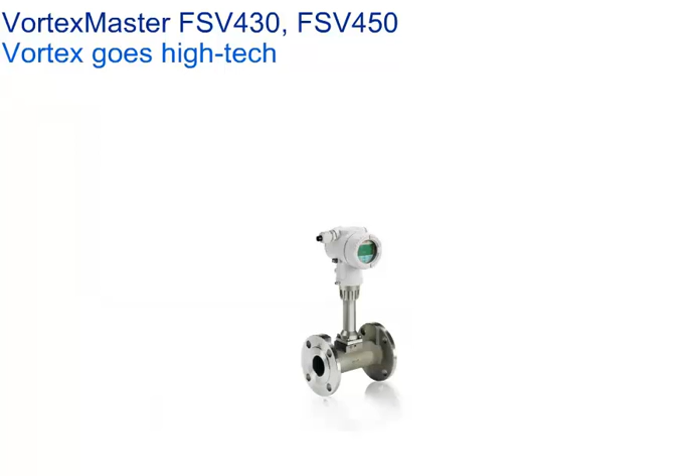The latest generation of Vortex Flowmeters is setting new standards in Vortex Flow metering. The following features are completely new: excellent vibration compensation, and the meter outputs as volume flow, temperature and pressure compensated volume, mass or energy flow.

The operating concept: typically, a Vortex Flow meter consists of the following main components: spool piece, piezo sensor, transmitter. The interaction between the piezo sensor and the transmitter is very important, as the raw signal from the sensor is often very noisy due to pulsation, vibration, and other hydraulic effects, and the transmitter needs to effectively filter out all of the interfering components to detect the correct flow signal.

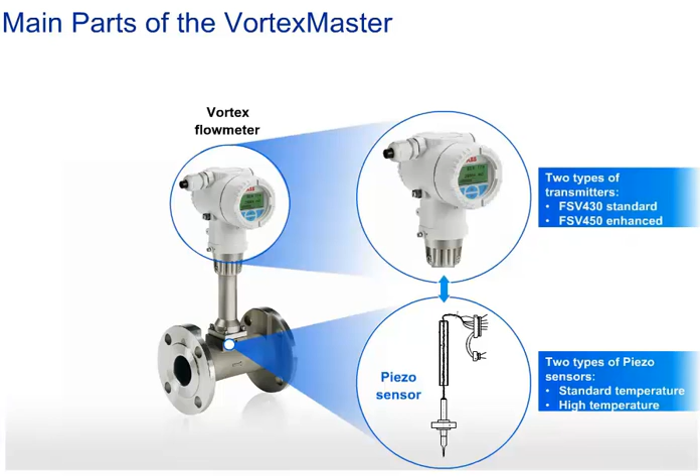The new generation of VortexMaster uses two types of sensors, one for standard temperature and one for high temperature. The ideally balanced piezo sensor is the heart of the sensor construction. To filter out noise and vibration at a very early stage, it uses two compensation piezos in addition to the two flow piezo elements. This makes the sensor signal very reliable and enables precise recognition of the actual flow signal.

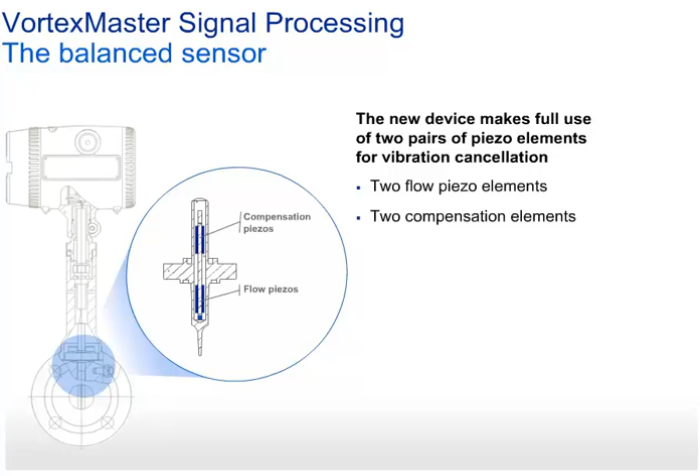As mentioned in the Basic Technical Principles module, the vortex signal is not a clear sinus curve, but is affected by hydraulic noise and vibrations, etc. Therefore, it's sometimes difficult to detect the right vortex frequency without any dropouts or additional peaks. Conventional vortex flow meters tend to measure in the same range as digital devices, but often less precisely.

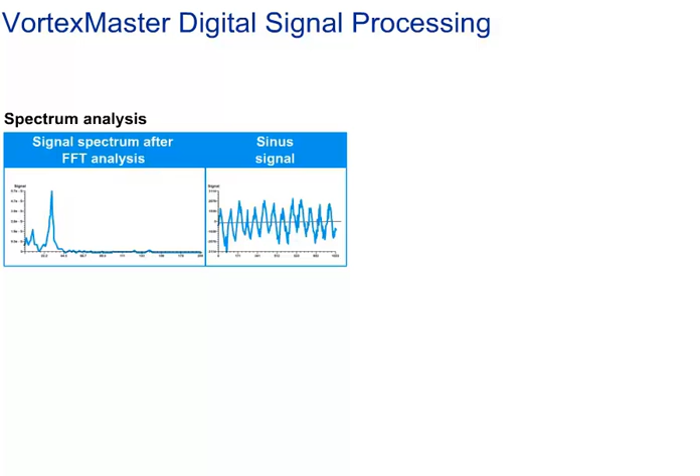Typically, the highest peak is the flow signal, but especially at low flow conditions, this may not be the case. A vortex meter without intelligent vibration control would pick up the highest peak and translate it into volume flow.

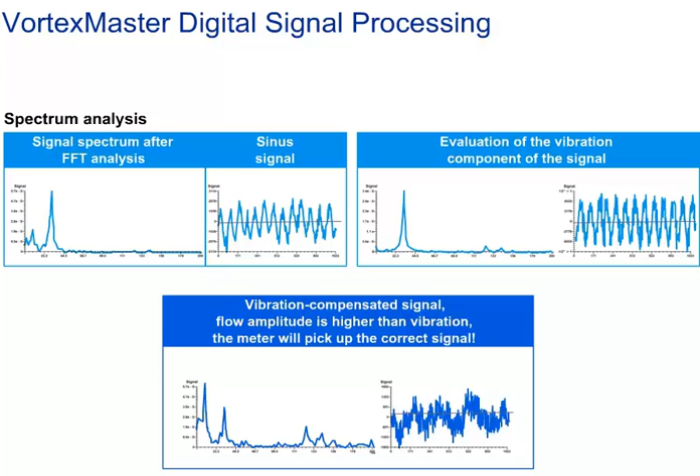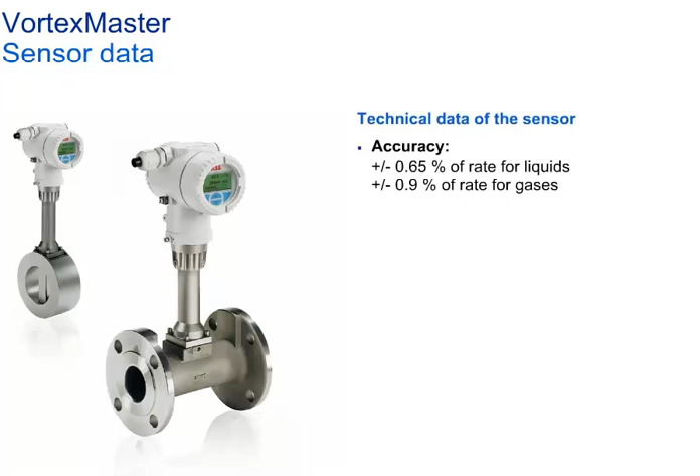Digital signal processing ensures maximum measurement precision and reliability. The accuracy is plus minus 0.65% of the rate for liquid measurement and plus minus 0.9% of the rate for gases. All meters are wet calibrated in water.

The standard temperature range is from minus 55 degrees centigrade to 280 degrees centigrade, which is minus 67 degrees Fahrenheit to 536 degrees Fahrenheit. A high-temperature version for up to 400 degrees centigrade, 750 degrees Fahrenheit, is available.

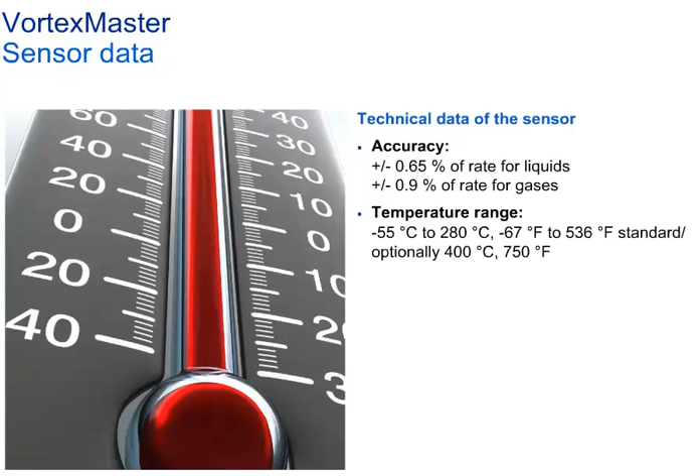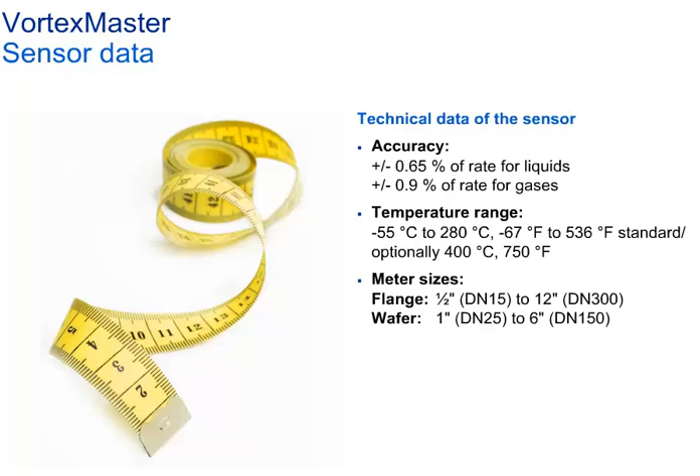The meter sizes for flanged meters are DN15 to DN300, that is, half an inch to 12 inches. Wafer-type meters are available from DN25, 1 inch, to DN150, 6 inch.

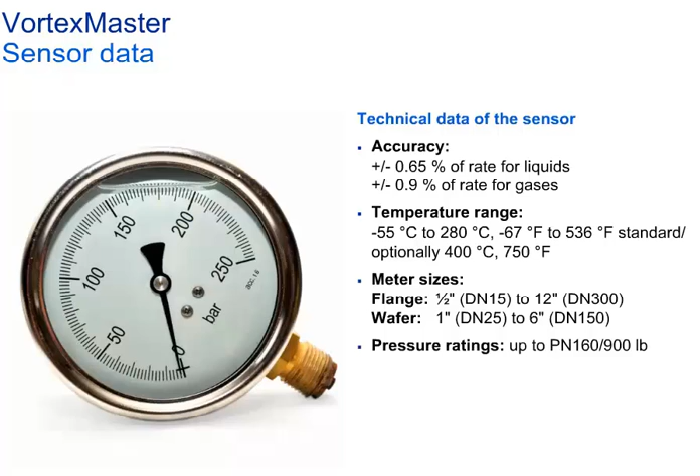The standard pressure rating is PN40, class 300. For non-standard devices, a pressure rating of up to PN160, class 900 is possible. The sensor housing is made of stainless steel 1.4571, which is ASTM 316 Ti. The casted meter bodies are made of CF8C. Hastelloy C or duplex, super duplex bodies are available on request.

The DIN wafer design has a 65mm lay length for direct exchange of standard orifice plates. The ASME design is available with longer lay length.

The basic meter is now more basic. It is supplied only with a 4 to 20 mA output, and it provides HART communication in the absolute basic version. This means that the display, HMI equals human machine interface, and digital outputs such as pulse output, frequency output, and contact output are now options.

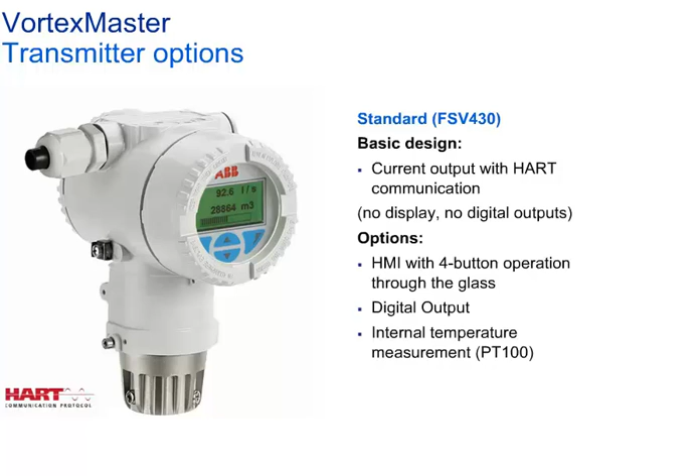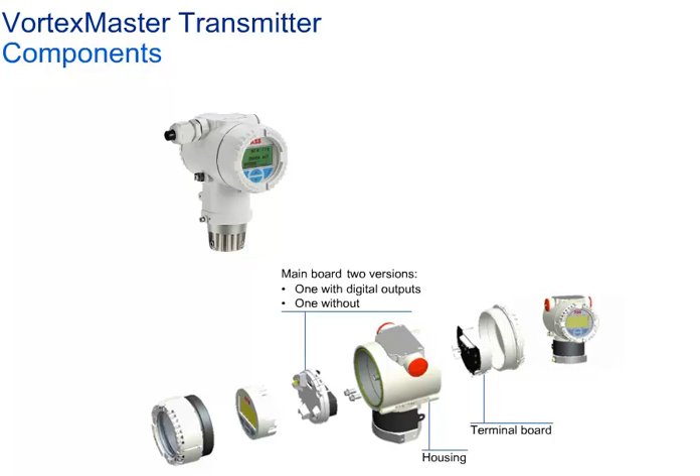The VortexMaster transmitter contains housing, terminal board, 2 different versions of the main board, optional HMI, display module, back and front cover. The transmitter housing is available in aluminium and stainless steel.

Depending on the option for digital output, the terminal board and the number of lead routings in the housing are different, meaning that a digital output cannot be implemented retrospectively without changing the complete transmitter box.

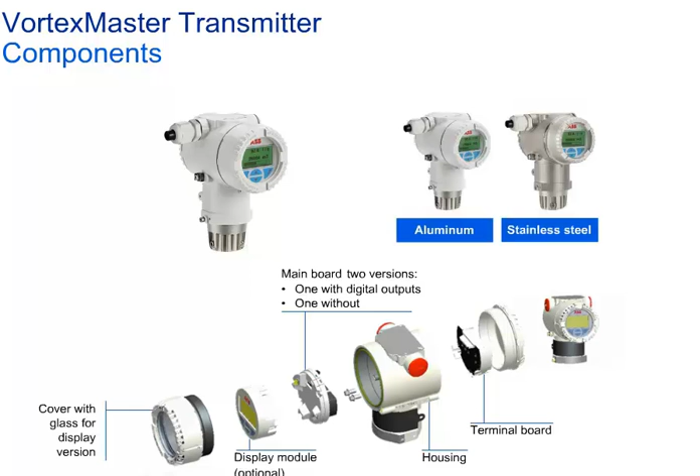The VortexMaster can read in values from the following if they're connected to the same bus by HART: pressure transmitters or temperature transmitters. The prerequisite for this is that the connected device must send its information in burst mode, meaning that it continuously sends the primary value.

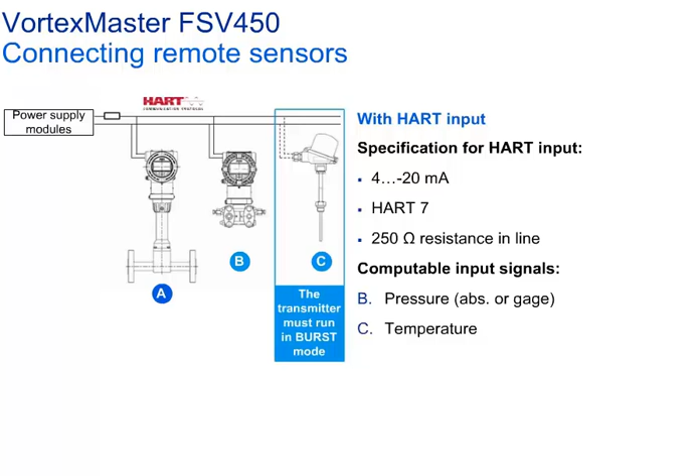The HART input can be combined with the analog input, meaning that it is possible to connect a maximum of 2 remote sensors to the VortexMaster, one via HART and one via analog input. Important information: a maximum of 1 unit should be on the bus in burst mode.

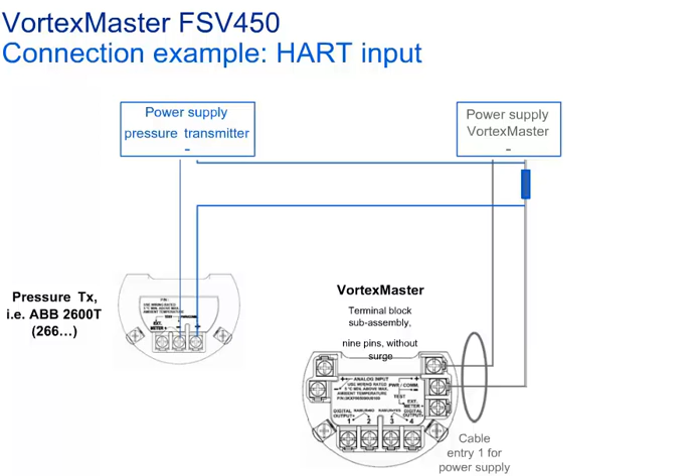For the HART input, the following applies: a 250 ohm resistor must be implemented in the power loop of the VortexMaster, and the pressure transmitter must use the same plus or minus power line. Both transmitters must have their own power supply.

Analog input is optional. The VortexMaster can use it to read in values from pressure transmitters, temperature transmitters, gas analyzers, densiometers or Coriolis mass flow meters connected in line with the remote sensor output. The analog input can be combined with the HART input, meaning it's possible to connect a pressure transmitter and a gas analyzer to the VortexMaster to enable pressure compensation and parallel net methane flow computation.

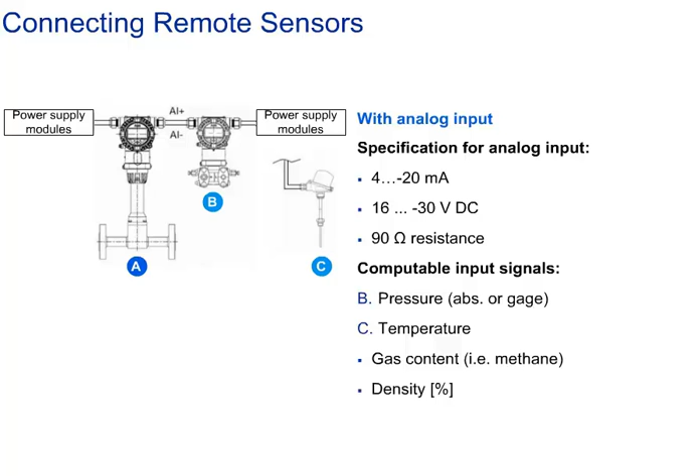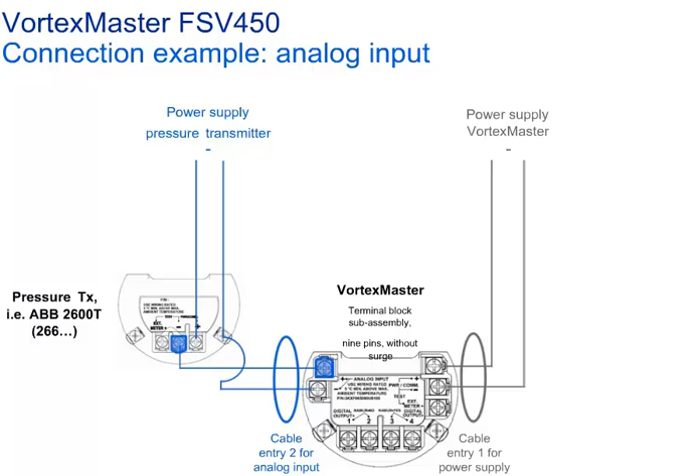Important: both devices must use independent power supply units. The analog input of the VortexMaster must be in line with the power loop of the connected remote sensor. The second cable entry of the VortexMaster can ideally be used for the analog input.

Remote transmitters can be used in various installations. Typically, they're used where the measuring points are not easy to reach. Alternatively, they're used for atmospheres with high ambient temperatures.

In contrast to the TRIO-WIRL FV450VR, where we're limited to 10 meters, equal to 32 feet maximum cable length, the new VortexMaster transmitter can be installed further away from the sensor, up to 30 meters away. Cable lengths of 5 meter, 10 meter, 20 meter and 30 meter are available, and the cables can be shortened by the customer individually.

Improvements have also been made in the temperature range. High-temperature sensors can now be connected with remote transmitters as well.

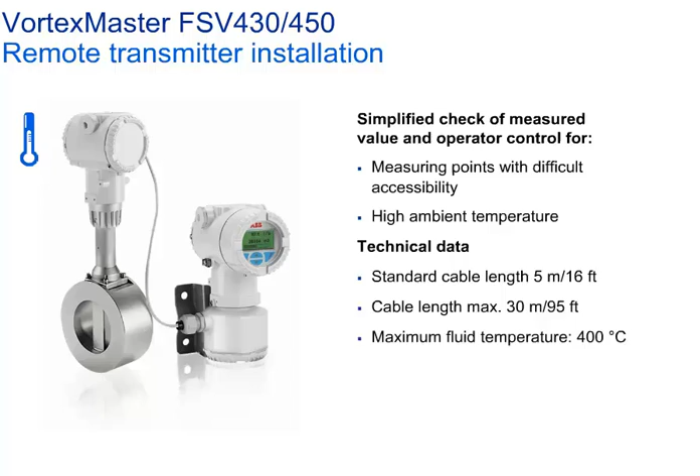As an option, the VortexMaster can be equipped with an integral temperature sensor. This is the PT100 sensor. It is integrated in the piezo sensor unit and can be used to control the temperature limit and/or to compensate for the temperature impact on liquids, gases, or steam within the meter.

In saturated steam in particular, where it's sufficient to know the pressure or temperature, the integral temperature measurement helps the customer save additional costs for installation of pressure or temperature transmitters.

Using the FSV450 with the interface for a pressure transmitter, the integral PT100 can be used to calculate the mass or energy as well as for overheated steam or for gas standard calculations. Sometimes the compensation calculation is performed with an external flow computer, and as this is no longer necessary here, this investment can be saved as well.

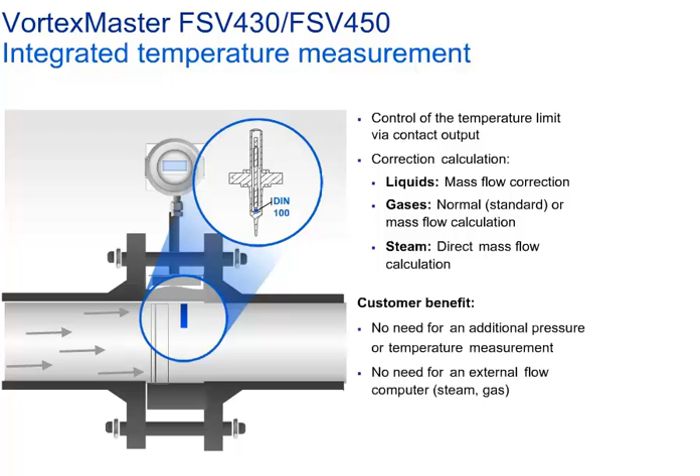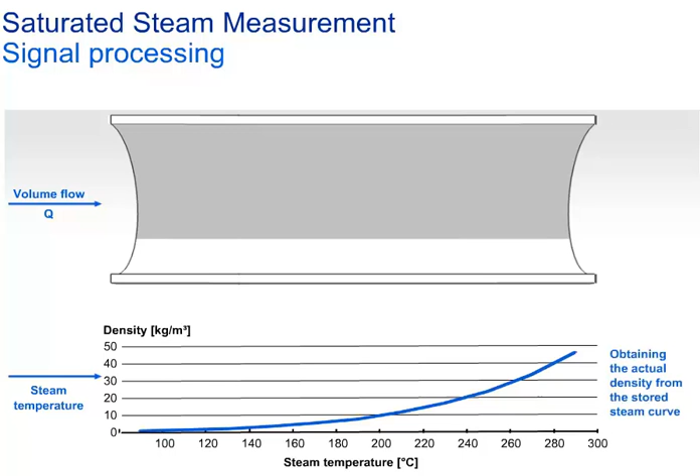The piezo sensor is used to measure the actual volume flow. The integral temperature sensor measures the steam temperature. The transmitter is in steam mass flow operating mode for saturated steam. The steam curve for saturated steam is implemented in the transmitter, thus it knows which steam density is related to which temperature.

For example, at a steam temperature of 230 degrees centigrade, the density is 13.96 kilograms per cubic meter. The volume flow is multiplied by this density to obtain the mass flow in kilograms per hour. This value is mapped to the output of the analog device, HART communication, or per digital output as frequency output or pulses.

In the FSV450 VortexMaster, not only is the saturated steam calculation implemented, but the calculation for overheated steam as well. Once the device registers that a pressure transmitter is connected to the VortexMaster, this value is also used for correct steam calculation.

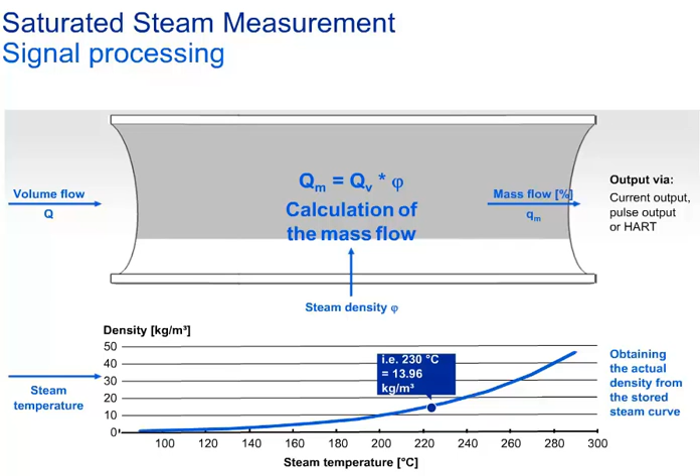Vortex Flowmeters can cope with demanding applications. For these cases, Vortex Flowmeters with 2 sensors and 2 completely independent transmitters are available as engineered solutions. Both can be realized as integral or remote versions. The temperature of the medium is the same as for standard meters.

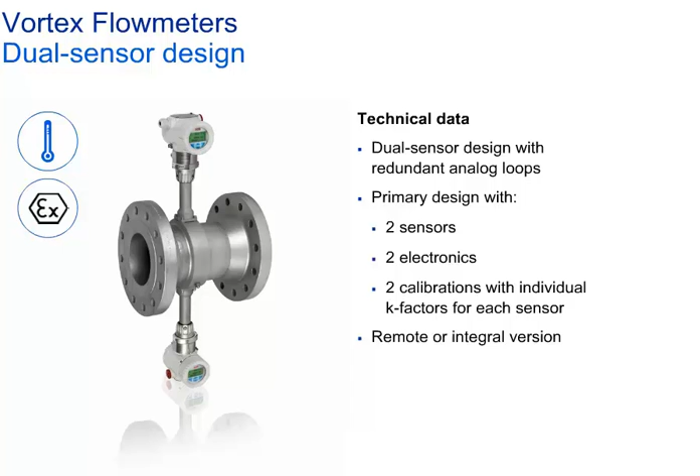High temperature versions are available as well. The design is the same as for standard meters. The installation lengths are the same as for standard meters, allowing the customer to replace a single sensor device with a dual sensor one. Dual sensor devices are available in remote design as well. The minimum line size for installation of the second sensor is DN50, 2 inches.

Dual sensor devices are often used for triple validation, which is a 2 out of 3 measurement, meaning that 3 sensor signals are recorded and evaluated in parallel. If one signal deviates from the others, the faulty sensor can be easily identified and exchanged during the next regular plant shutdown.

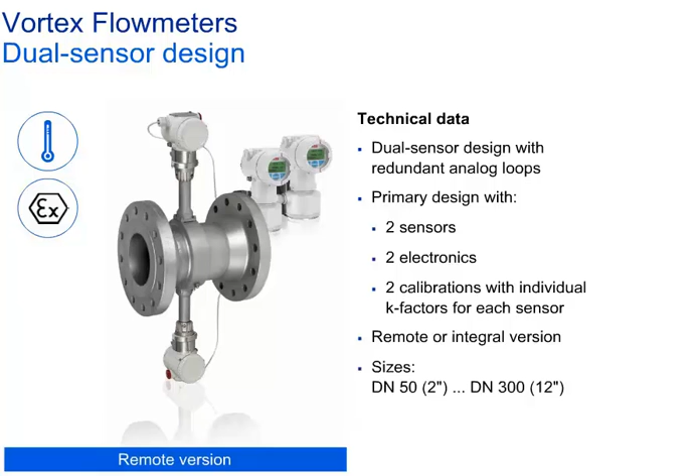A further application: equip one transmitter with analog or HART communication and the other transmitter with fieldbus communication. This allows for a later plant upgrade. One of the special advantages of the design is that sensors and transmitters are completely independent of each other.

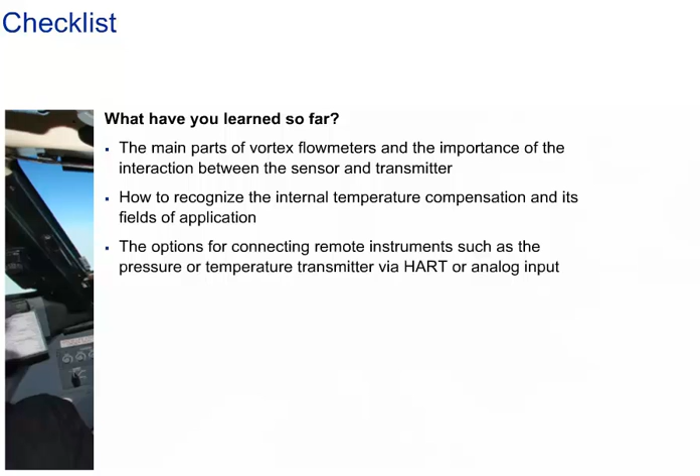Let's summarize everything in a checklist before moving on to other topics. What have you learned so far? You've become familiar with the main parts of Vortex Flowmeters and product variants. You can recognize the internal temperature compensation and its fields of application when you provide advice to your customers. You can also list the options for connecting remote instruments such as a pressure or temperature transmitter via HART or analog input. You can describe multi-sensor devices and their advantages.